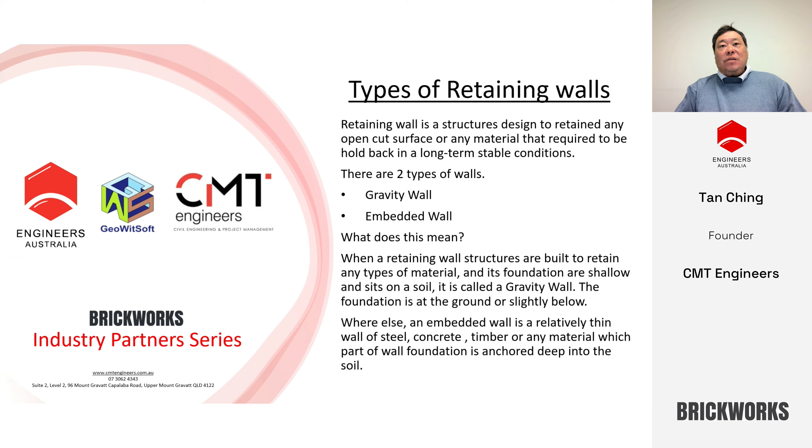Whereas in embedded wall, it is a relatively thin wall, thin steel structures, timber, and any material which forms part of the foundation. And the foundation is anchored deep into the soil. So that's the difference between the two of them. One, the foundation is shallow. The other is deep into the soil.

Now, that's a couple of pictures here showing types of gravity walls that's been widely used in the industry. I've shown 5 types of gravity wall. One is called a masonry wall. It is actually a block wall, which is hollow. And when it is built, you actually fill it with concrete and steel reinforcement. The next one is called a reinforced wall.

It is commonly used in bridge abutment. And the disadvantage of this wall is that it's got geogrid and tie-back reinforcement right behind the precast concrete panel of that reinforced wall that relies on the backfill material for friction to hold the wall. The next picture is a stone wall. It can actually be a sandstone block cut in size, or it can be cobblestone or large boulders built up as a mass gravity wall.

The other one is normally called a crib wall. It actually consists of precast units, which are stacked up and assembled into a height to retain the soil, and is infilled with road-base material, which forms part of a mass gravity wall. The last of it is the concrete reinforced wall, which conventionally is a designed wall, a custom designed wall, where you design based on the height, the soil foundation, and is a concrete reinforced wall which has steel reinforcement and concrete forming part of the wall.

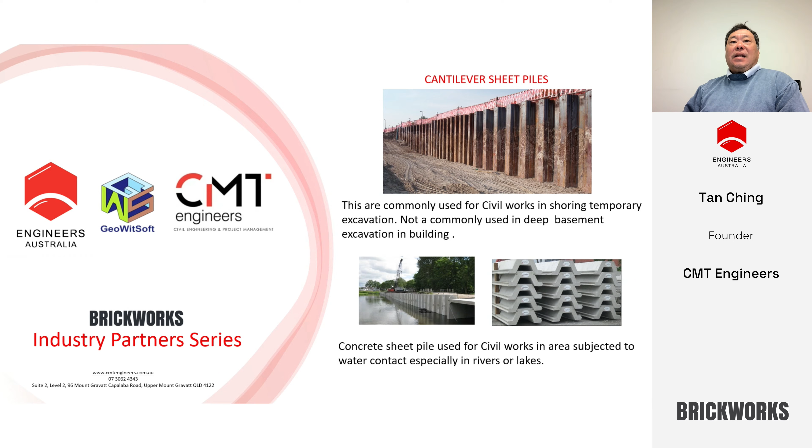These are all basically cantilever design embedded walls. Another type of embedded wall is contiguous bore piles, piles constructed by drilling rigs, where they are drilled below the ground next to each other, and then excavated to expose their surface. It's basically a cantilever embedded wall design, widely used in the construction of basements of buildings.

The next picture is a picture of contiguous bore piles being used to hold a road embankment, where road works are being done below the toe of the piles.

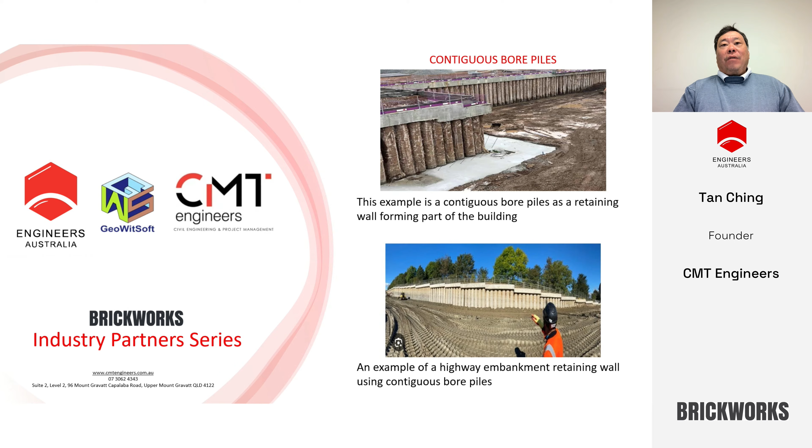Another type of embedded wall, I wouldn't call them piles, is secant piles. You can see from the schematic diagram that it's actually piles intersecting each other, very widely used in deep excavation, where you want to prevent water from coming into the basement. They are used in buildings, especially deep buildings. If I'm not mistaken, I think the Queen's Wharf project in Brisbane was using secant pile or diaphragm wall.

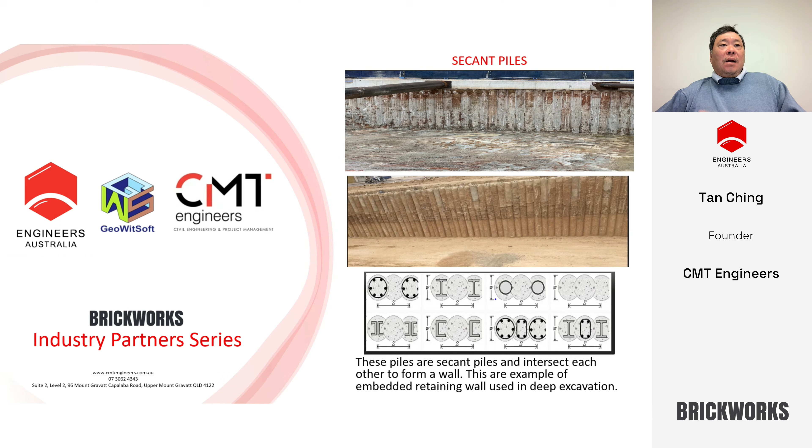Okay, let's see what the current AS4678 2002 says anyway.

In the current code of AS4678, there is no section or any design on embedded wall. Please take note, because there is a lot of king post wall, especially for brownfield and infill jobs, projects, where designers are designing embedded wall and they are not using the right formula.

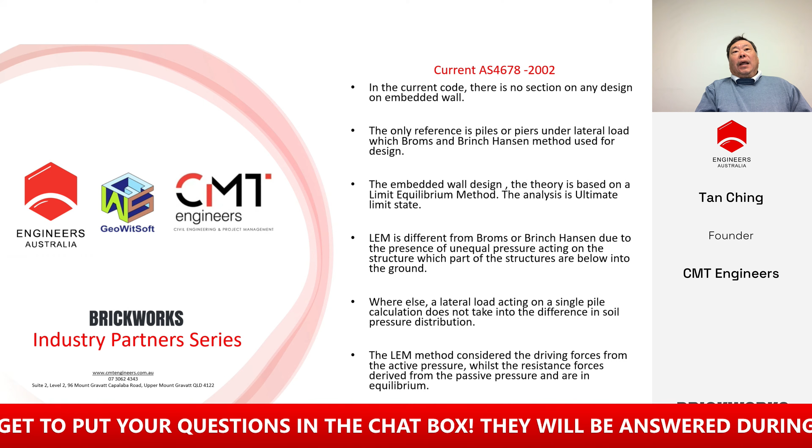The only reference that's in AS4678 on piles or posts under lateral load is the Brinch-Hansen and the Brom's method used in the design, and that is in accordance to the piling code. The design of an embedded wall uses a theory called limit equilibrium method, and this analysis is ultimate limit state.

This formula has been around for the last 24 years, and is widely used for all embedded wall design in large projects. However, AS4678 has no reference to that LEM method.

The difference between the LEM method and Brom's and Brinch-Hansen is due to the presence of unequal pressure acting on the structure, which form part of structures below into the ground. So it's a totally different set of calculation and methodology, where Brom's-Brinch-Hansen is just a lateral load, not due to pressure, but a lateral load acting on the pile, whereas the LEM is actually a set of calculation which is due to the difference of soil pressure that causes a loading onto the structures.

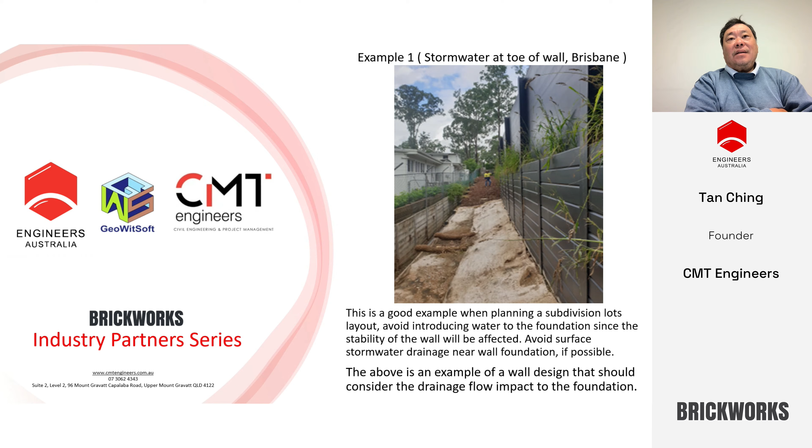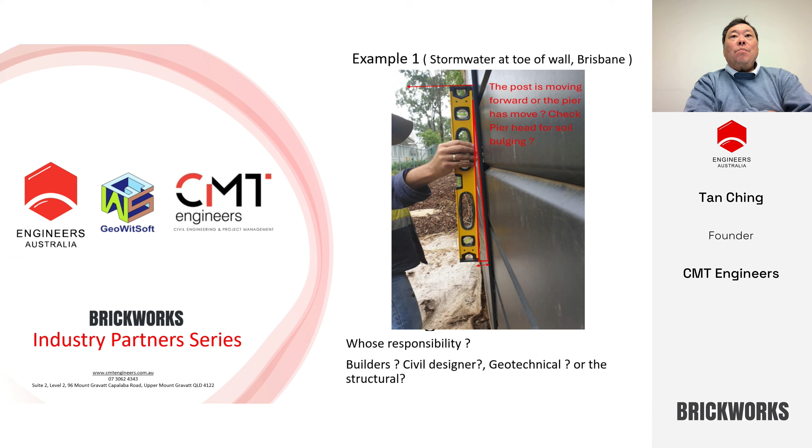A typical example, I will show you what goes wrong. A real life project down in Brisbane, a stormwater at the toe of the wall. Did the civil engineer think about the wall? Did the wall designer think about the stormwater? Guess what happened? The wall moved. That's a real life project. The wall actually moved. Now, whose responsibility is that?

Overland flow path - see the upstream, behind the wall? It's a big patch of open space, and water was just sheeting, flowing down, and it wasn't taken into account in the design. It's a very good example when you design a wall: think about sheet flow, and involve the structural and geotechnical engineers. You've got to highlight to the civil engineer that water is always the culprit of wall failure, and ask whether the water sheeting from behind is being captured and diverted. These are all risks that can be mitigated as a designer.

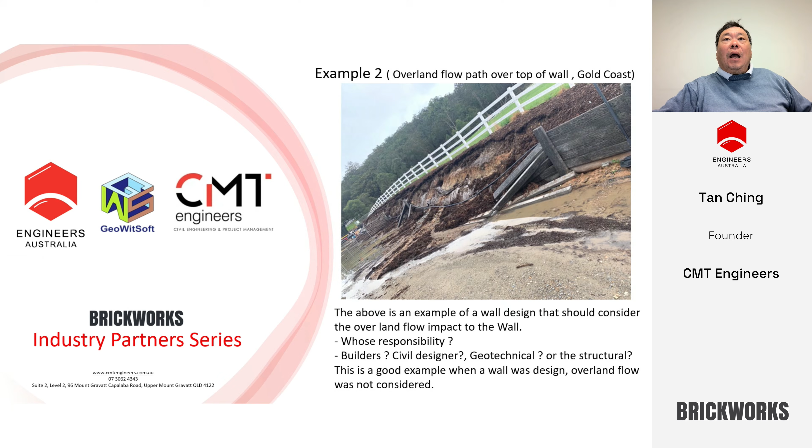In a normal LEM method calculation, you have to do two parts. One is the LEM method, where you find the embedment depth. The next part is to find the serviceability, where you normally use a soil structure interaction to find out the deflection on the piers and the posts.

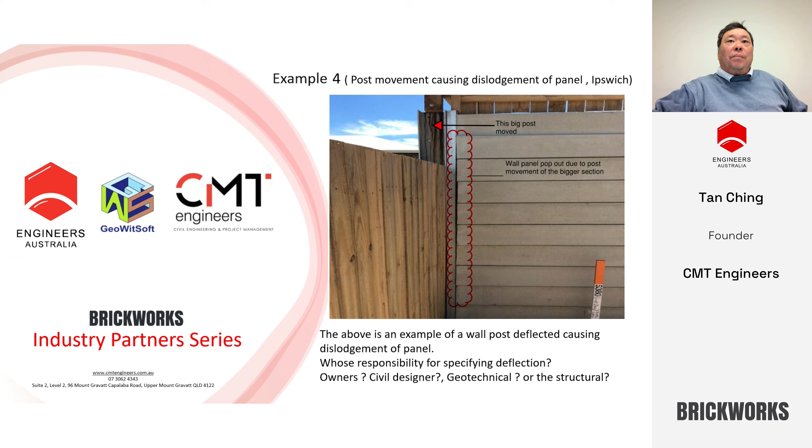A typical good example for civil engineers: when you do site stormwater drainage next to a wall, please consider diverting and capturing your water away from the wall, or design for the surface water.

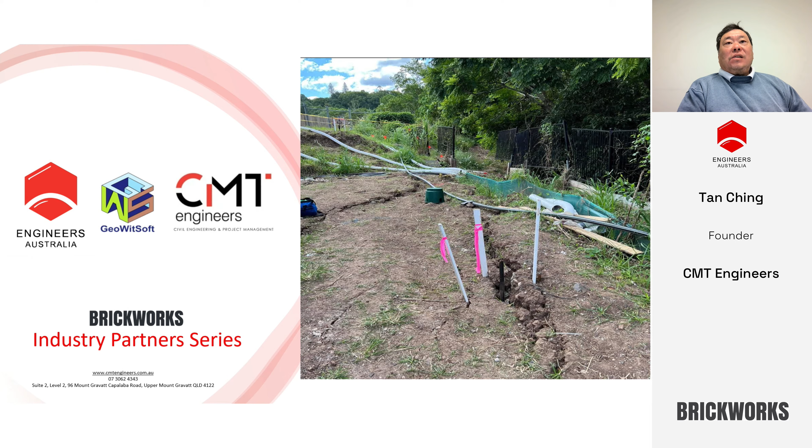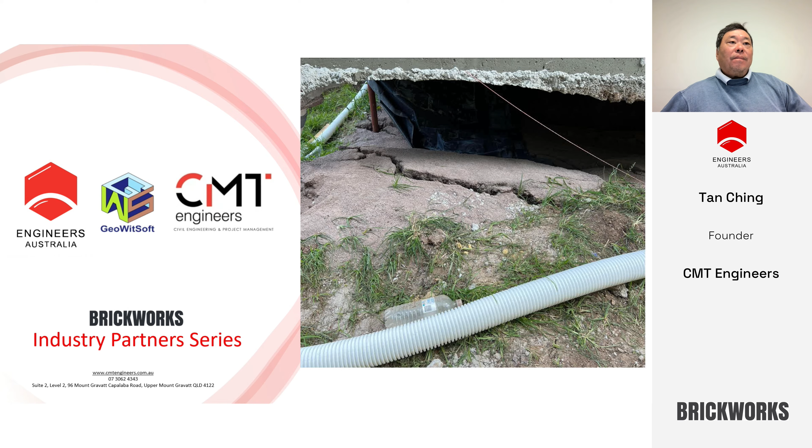Next to the wall was a house on screw piers, and the whole land had subsided and separated out from the house foundation. There you are, you can see the house sitting in the original position, and the land has subsided.

When you design an embedded wall, always be cautious that if a wall is built on a slope area and is holding a fill, or is holding a fill sitting on a slope, just be cautious that a slope stability analysis needs to be undertaken. It's not just about designing the wall itself to stand.

My next point on mitigation of design risk is from the point of view of a builder. As a builder, when you build, just make sure that your material compliance is met, especially for steel posts. Check the steel mill certificate, whether they are as per ACRS or not, because steel sections coming from overseas are different from steel sections manufactured in Australia. Just be cautious about it.

Even if you might have a mill certificate produced from overseas, it is not exactly the same as what is required in Australia. Take note of this, because their grading is totally different anyway.

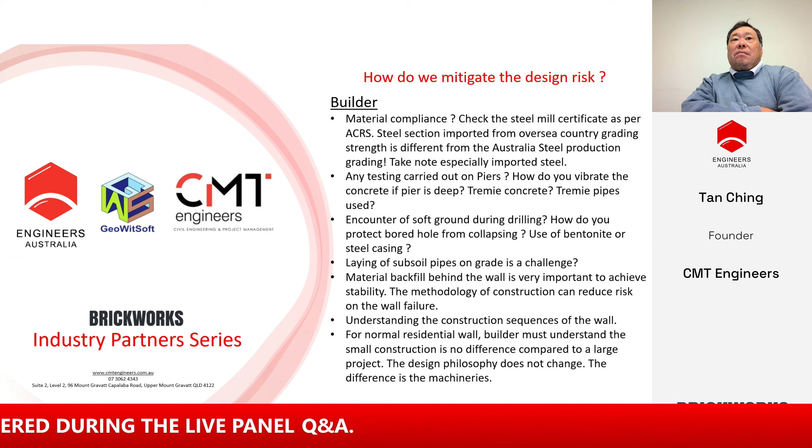Next, make sure you test or carry out checks on the piers. How do you vibrate the concrete if it's too deep? What sort of concrete are you using? Are you using tremie concrete? Are tremie pipes being used? I know tremie pipes and tremie concrete are used for large scale projects which have deep holes, but bear in mind these are good practices, because you want to ensure the concrete is fully compacted and not segregated.

The next point is how a builder can assist a designer to mitigate risk. If you drill a normal ground and encounter soft ground which is different from other holes you've drilled upstream or downstream, think carefully whether the hole is going to collapse, or how are you going to prevent the collapse. These are all things that can help a designer mitigate risk.

It is actually a construction methodology. For small infill jobs, one meter up to two meters, I know a lot of people don't use casing. They normally use forms, buying a circular form to try to hold back the holes from collapsing. But bearing in mind, at the end of the day it's the quality of the piers that is very important and will help mitigate the design risk.

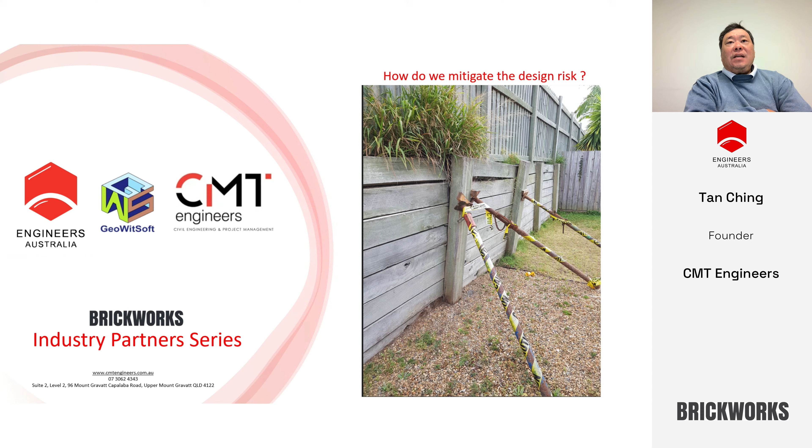A two-tier wall failure, right here in Brisbane. There's an acoustic fence on top of the upper wall, and the separation between the upper wall and lower wall is minimal. Panels dropping off tell you that the post has failed, meaning the embedded piles or piers below the ground have all moved, causing dislodgement of the panels.

A typical design in a clouded area showing some design work, then some construction work, and patch-up work for a wall in a large subdivision. That's the blow-up of the area, showing how the whole panel and post are being held up by just a piece of reinforcement rod.

That's real life. That's happening out there, really happening out there. And engineers who inspected the wall sign it off, and it's shocking.

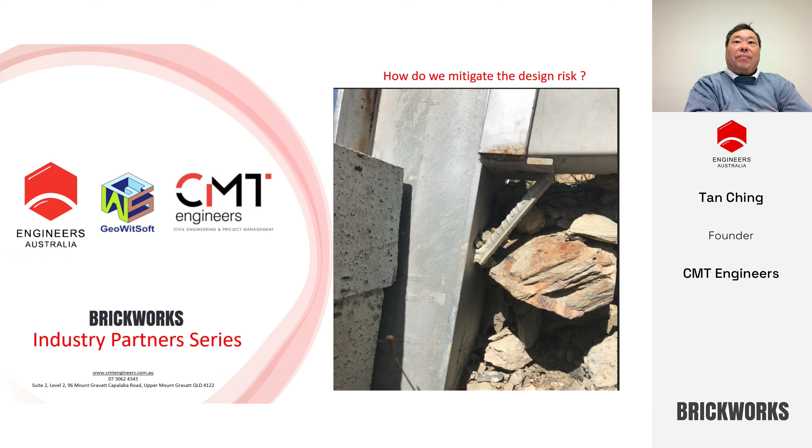All right, next, sheet pile movement. Yep, that was down in Brisbane. Whole entire sheet pile move. Sewage pipe right behind that building there was all dislocated. It was a basement excavation using sheet pile. That's 100% failure due to movement and toe embedment, not enough, insufficient.

An overland flow path. Imagine how strong the impact of water energy causing a dislodgement of a concrete slipper wall. It's not the geotechnical or the structural engineer's fault, but I'll put it onto the civil engineer for not being able to see the impact of surface water.

In the AS 4678 next amendment, there will be some sort of cutoff drain in one of the chapters that the civil engineer will have to design to capture the overland flow path if there is, or any on-site stormwater. So take note.

Slipper wall or embedded wall, any gravity wall, the design is not just solely on a geotechnical or structural engineer's responsibility. It is also a civil engineer's responsibility. It is a complete system consisting of 3 disciplines.

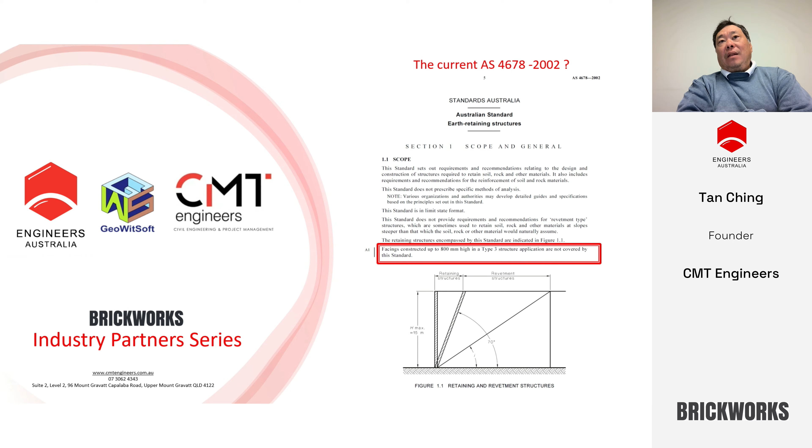And I'll give you a little bit of history about AS 4678-2002. When AS 4678-2002 was published 25 years ago, with only one amendment in year 2003, the building code, or the national code as it's now known, has never had any compliance reference on designing retaining walls, which is classified as 10B. This means a retaining wall, engineered, has no performance standard to gauge with. It was only in 2019 that NCC decided to publish a section on retaining wall design and make reference to AS 4678-2002. So that's an extract from the NCC code.

So what does it tell us? So this is what it means. It says that prior to AS 4678-2002, any design of a retaining wall, be it a large project or a small project, there was no code for the design of any retaining wall at all. The engineer was responsible for his own design and using his own design criteria set in the design.

When AS 4678-2002 was published, all walls from then onwards had to be designed as per the code. And that is the reference for wall design that every engineer uses now. But as I said before, until 2019, there was no reference in the building code at all. In 2019, NCC decided to put in a code to say that, hey, it's a 10B classification, it now needs a performance standard. So the AS 4678 is the measuring tool to measure the performance of the wall.

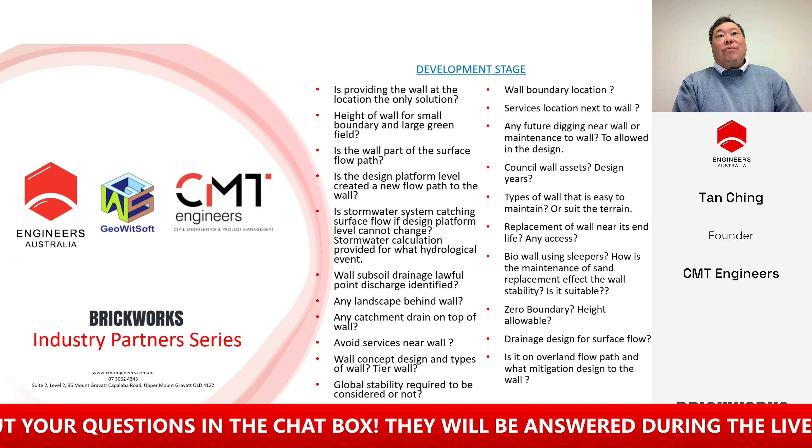In a development stage where you get a big project and you assess the layout and the engineering concept, these are a couple of questions you always have to ask while vetting the drawings. Is the wall building on that location the only solution?

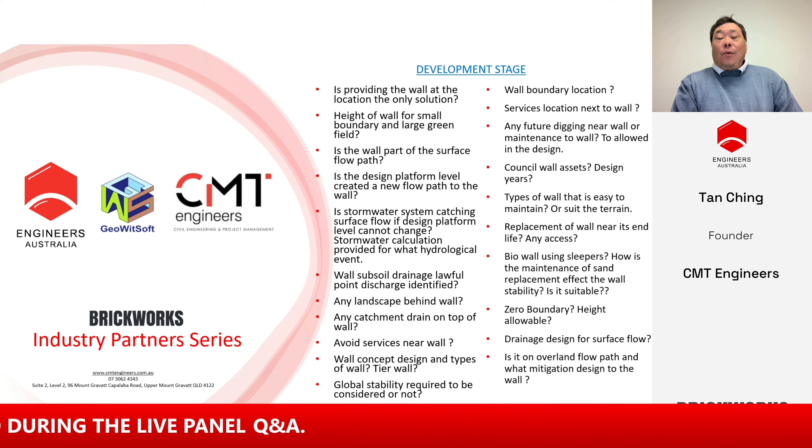Do you need to fill that high, or is there any other way? Are the height and the boundary location of the small wall right? Are they bound at the boundary, or in the upper wall or the lower wall?

Is there any flow path coming down behind the wall? Is the design platform created to allow a new flow path into the wall? This is an example where you build a wall on a natural surface water flow path - you don't want to do that.

That's creating risk. If there is an upstream catchment coming down and you can't avoid it, well, have you thought about the drainage? Has the drainage been calculated? Has the drainage been designed right behind the wall to capture that? And what's the stormwater event that is needed to calculate?

Is subsoil pipe drainage laid to a lawful point of discharge, and has it been identified? Is there any landscape behind the wall? These are all things that will influence the performance of the wall. Any catchment drain on top of the wall?

Is there any services there? Can it be avoided? What type of wall is it - a tier wall? Is it a concrete sleeper wall? Is it a block wall?

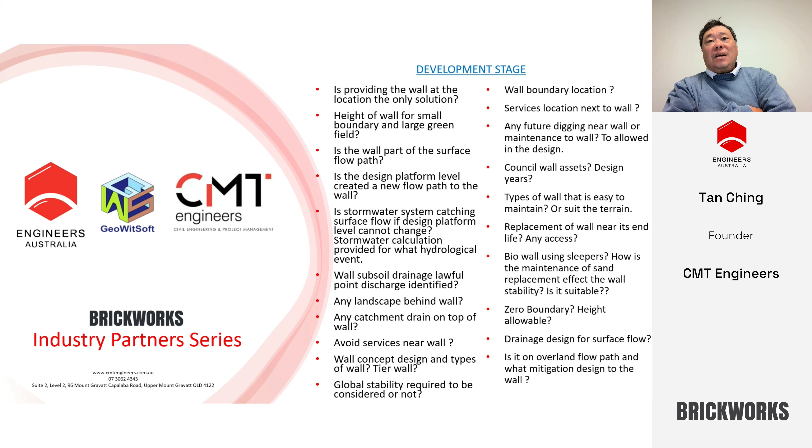Drainage design for surface flow and overland flow path, how you mitigate it. So when it comes to operational work, that's where you do your detailed checking - make sure that soil investigation reports are given and what types of testing, not just site classification.

That's not right anyway. Was there any global stability undertaken? Next question - did the structural and geotechnical drawings form part of the project consultant, not piecemeal?

You've got to make sure the design of the wall by the geotechnical and the structural engineers is incorporated into the civil set so that you get a complete set. You have track records and records on the documents.

The wall products - if we are using a wall product to form a wall system, is it approved? Is it approved by the building code? In the building code, does it meet the fire rating?

And the next thing is check the Form 15, make sure there's no exclusion - very common. The structural engineer will say that he's designed the wall, but exclude geotechnical. The civil guy will not even do any Form 15 for the retaining wall because he says he's not involved in drainage. So who is involved in drainage?

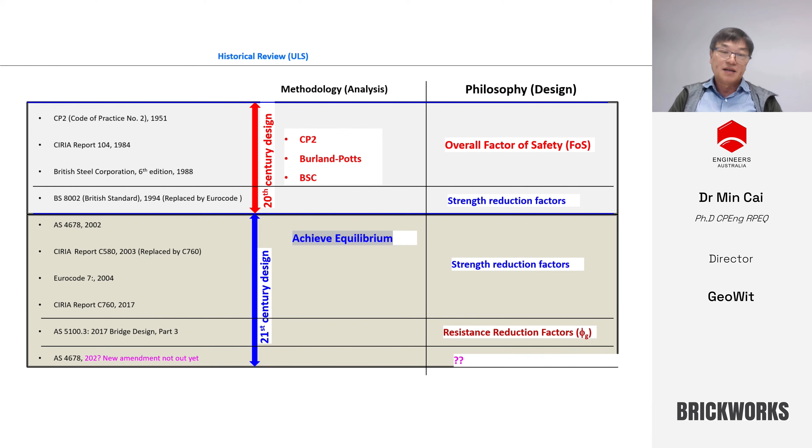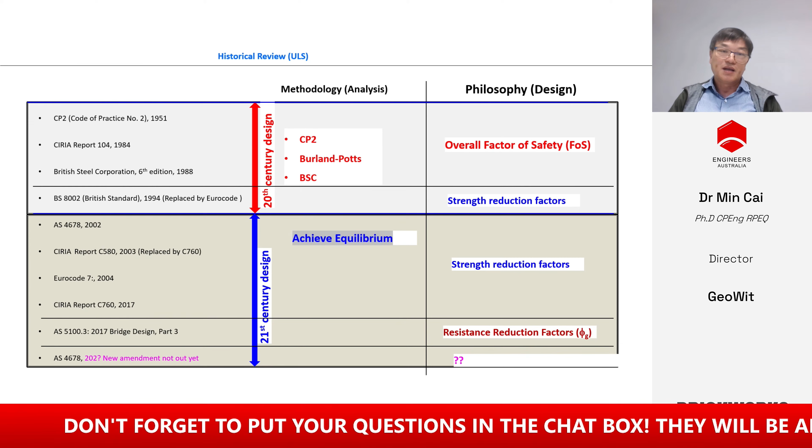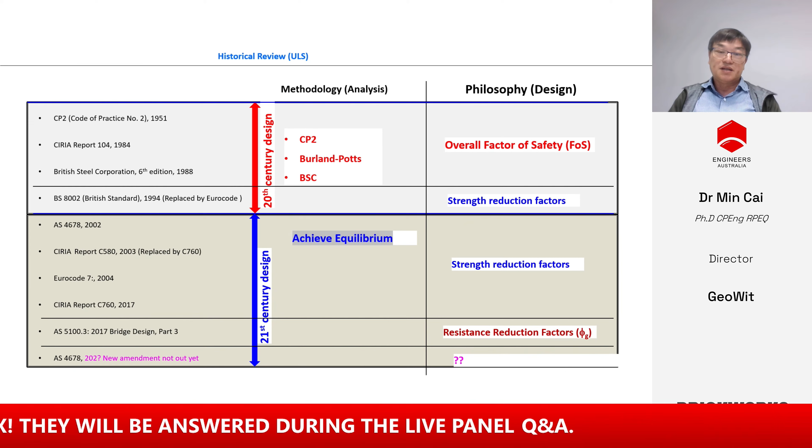I'll come to the methodology of analysis first. Any geotech engineer with experience designing embedded retaining walls must be familiar with terminology like CP2, Burland-Potts method, BSC method. But it's very interesting to note that when it comes to recent design codes, reports, and documents, all these conventional methods have disappeared. The key word has become something like 'achieve equilibrium.' So from a design philosophy point of view, it has gradually evolved from the traditional overall factor of safety method to the strength reduction factor method, or resistance reduction factor method.

I'll dig a little bit deeper into the methodology of analysis, taking the cantilever wall as one example. The cantilever basically relies 100% on the depth of embedment to achieve equilibrium and stability. So the failure mode is against a point close to the pile toe, generally referred to as the pivot point. Below and above that point, the earth pressure changes direction. This is the theoretically correct approach.

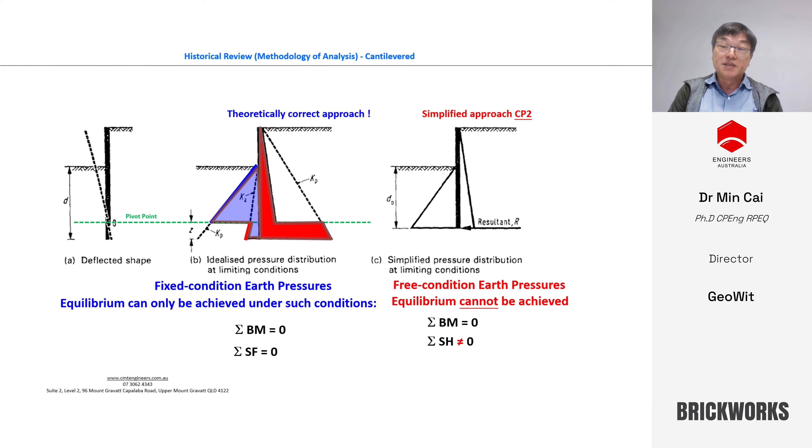We've got two equations, and from these we can determine where the pivot point is and where the toe level is. But unfortunately this analysis itself is quite complex, which has left room for a simplified approach like CP2. The CP2 method was first proposed in CIRIA report 104. It is not a complete equilibrium solution, as I'll show in the next slides. The bending moment is at equilibrium, but the shear force is not.

CIRIA report 760 has a bit more detail about this methodology, but basically the principles are exactly the same: two equations, two unknowns. The unknowns for the cantilever are basically the pivot point and the toe level. I won't go into the details of that, but anyone interested can have a look at the CIRIA report.

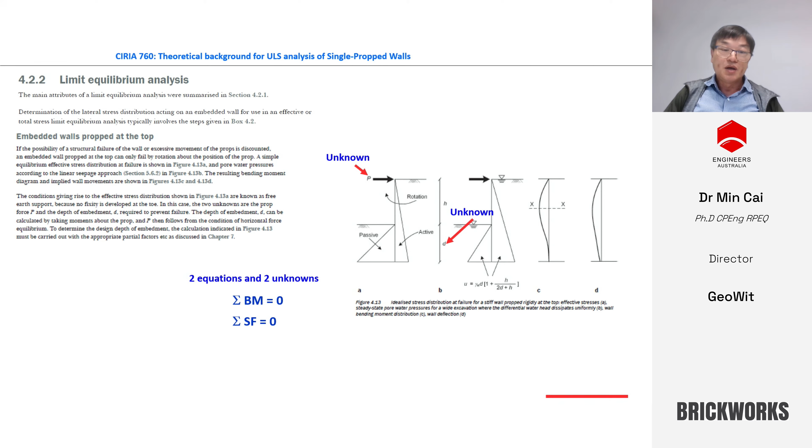The CIRIA report also has a section for single propped walls. The principle and approach are exactly the same: two equations and two unknowns, but this time the unknowns become the prop force and the embedment. This makes the calculation much simpler, because if you take the bending moment against the physical support point, you only have one unknown left. I just want to show something visually with some charts.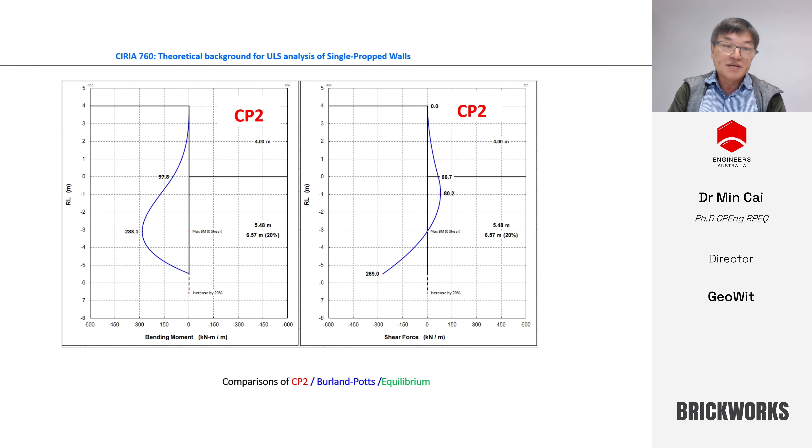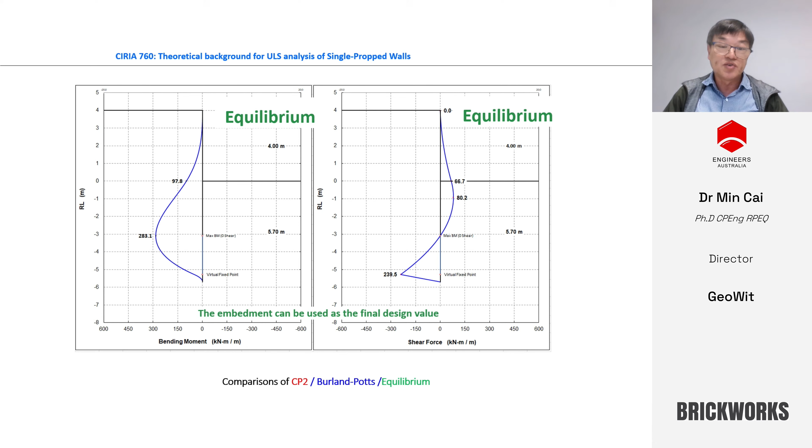Hopefully that makes it easier for everyone to appreciate. I've come up with a worked example using the CP2 method that clearly shows the bending moment is not in equilibrium for shear force. As illustrated in CIRIA report 104, to cater for this incompleteness, a 20% increase of the calculated embedment should be applied. I've also done a full equilibrium method, and you can see that both the bending moment and shear force are at equilibrium, so the calculated embedment can be used as the final design value.

I'd like to wrap up the methodology by comparing the results from different methods. The red dotted line is the toe level from CP2, blue is from Burland-Potts, and green is from the equilibrium method. I think this also partially explains why conventional methods like CP2, Burland-Potts, and BSC were never mentioned in recent design codes, because in my opinion the equilibrium method is a better option: it's theoretically sound, mathematically complete, and in line with all recent international standards and Australian standards. On top of that, it can give us a more economical design.

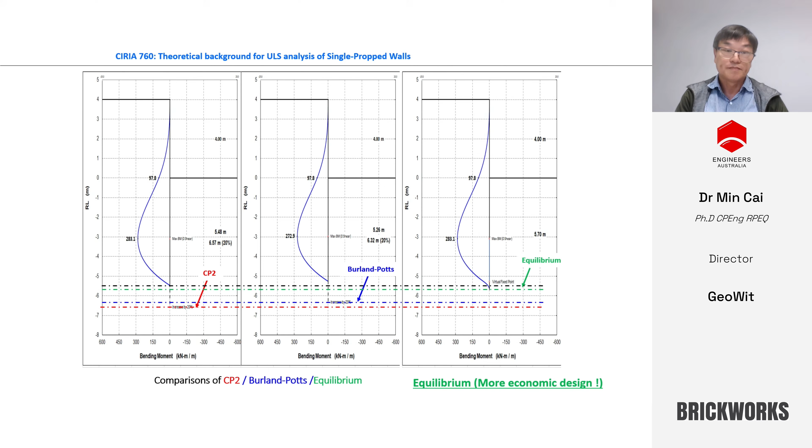Another important ULS failure mode is the piping resulting from seepage. I've shown some theoretical background - if you have any water height difference in soil, you will generate seepage. This seepage force is in proportion to the hydraulic gradient. Another important factor is how much hydraulic gradient can be taken by soil. Looking at this equation called ICR, it's interesting to note this ICR is similar to the submerged density. So the factor of safety is defined by the ratio of the I critical to the I exit.

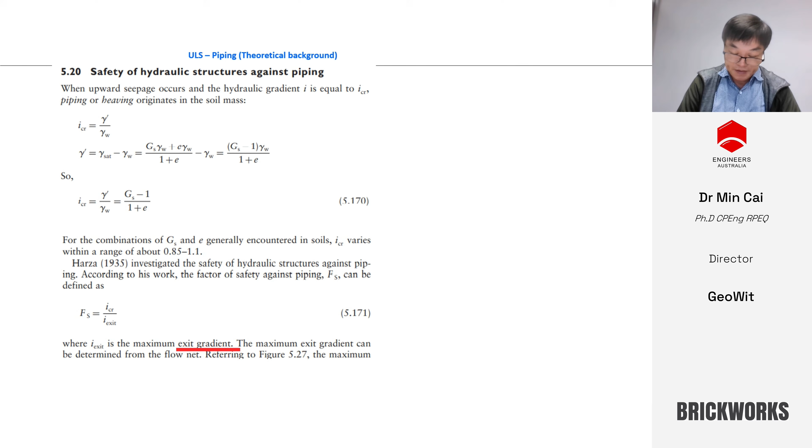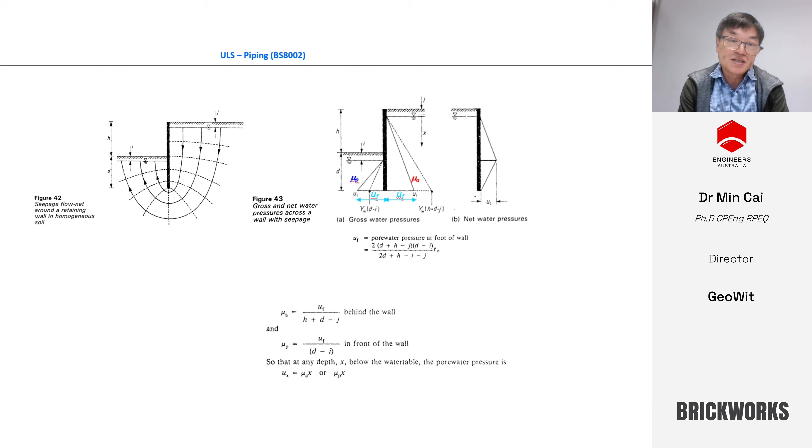This is what I've extracted from BS8002. It shows how to calculate the water pressures, including seepage. This is the design requirement as illustrated in Eurocode. It's interesting to note that the equations shown in Eurocode are the same as the theory, because the ratio of gamma dash by gamma W is actually the ICR, and delta H divided by D is actually the I exit. Eurocode has also given some partial factors for design: 1.35 for unfavorable and 0.9 for favorable. It is equivalent to an overall factor of safety of 1.5.

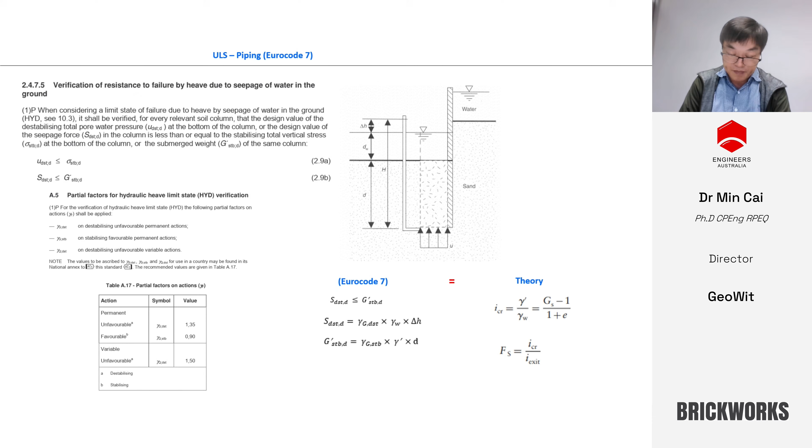So after these two overall requirements, we come to bits and pieces for the calculation itself.

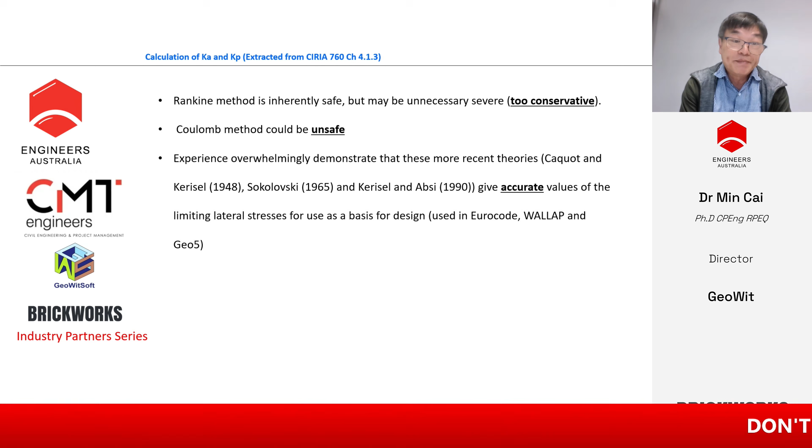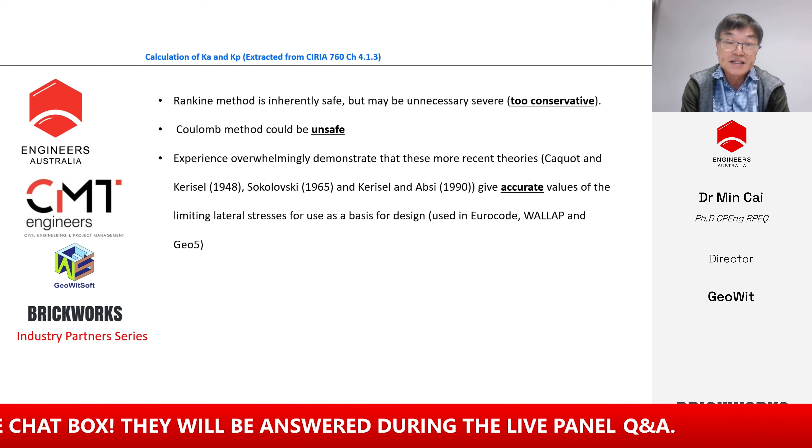I think the first thing we need to calculate normally is the Ka and the Kp. People either use a Rankine method or Coulomb method to do the calculation. I'd like to draw attention to what has been described in CIRIA report 760, chapter 4.1.3. Basically it says the Rankine method could be too conservative, and the Coulomb method could be unsafe. But recent theories, like what I've shown here, give accurate values of the limiting lateral stress for use as a basis for design. This has been used in Eurocode and in some commercial software like WALLAP and Geo5. These are the equations incorporating this recent theory - I won't go into details, but if you're interested you can have a look.

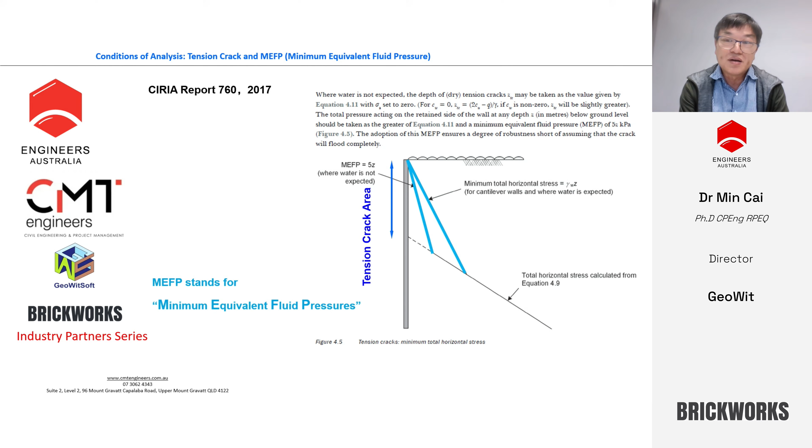Another important design consideration is tension cracks. We all know if we use a high C dash value, the top portion of the retaining wall will be subject to nothing - but the code does not want you to do that. It has introduced a concept called MEFP, minimum equivalent fluid pressure. If water is expected on the site, you have to consider the scenario where the tension crack could be filled by water, so you must use minimum pressure. Your MEFP should be like 10 times Z. Even if water is not expected, you still have to use a minimum MEFP equal to 5Z - that's almost equivalent to a Ka value of 0.25. BS8002 has a slightly different methodology to deal with tension cracks, but whatever it is, you still have to apply MEFP. You still cannot allow a portion of the retaining wall to be subject to nothing.

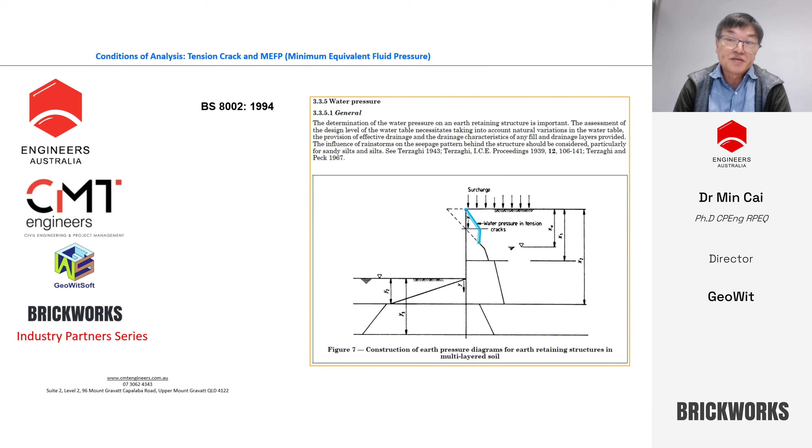Another issue is compaction-induced pressures. We've seen some reports about retaining wall collapse associated with this kind of pressure. So the message is very clear: if you haven't considered compaction-induced pressures, you have to make it clear in your report. Maybe you also need to put some control measures in place on drawings, something like lightweight handheld compactors having to be used with a certain clearance from the wall. Basically, you do what you say and say what you do.

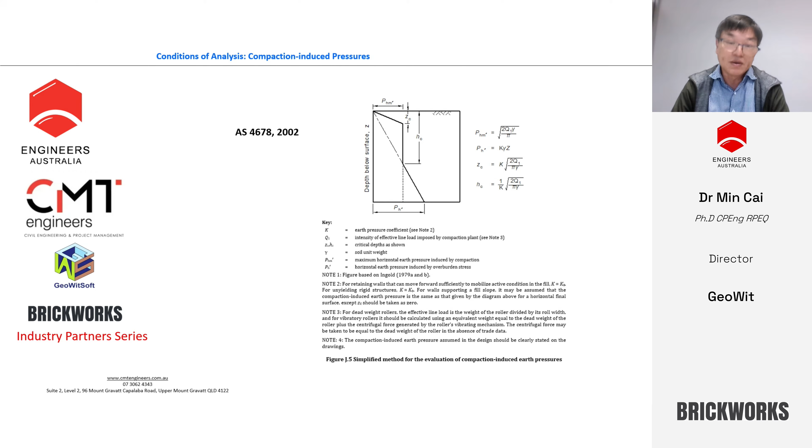After all this review, I'd like to look at what has been included in the current Australian standard regarding embedded retaining walls. It's interesting - there's only one place in the current Australian standard, in Appendix E. It says where retaining walls using embedded parts are adopted at a site, the design of such structures should be carried out as suggested in AS 2159 for laterally loaded piles. You know, AS 2159 is a pile design code.

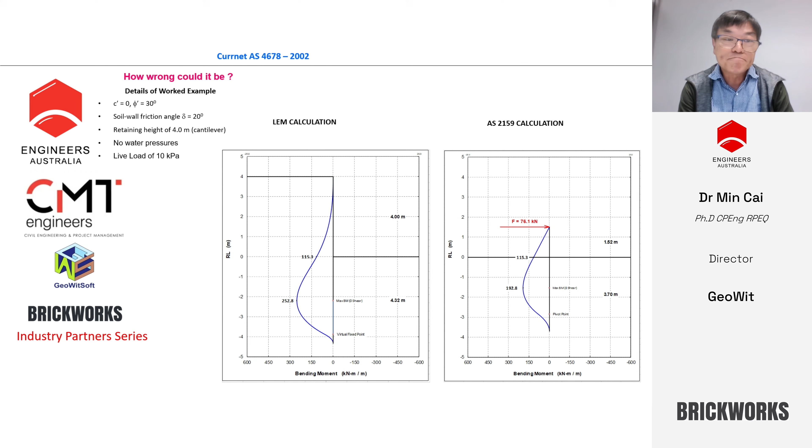So these are the typical cross sections in those two areas. Basically that is a very deep excavation, more than 32 meters, with two diaphragm walls propped by 9 layers of struts, with two JGP slabs. The top JGP is called the sacrificial JGP slab because it will be demolished and removed when the excavation progresses.

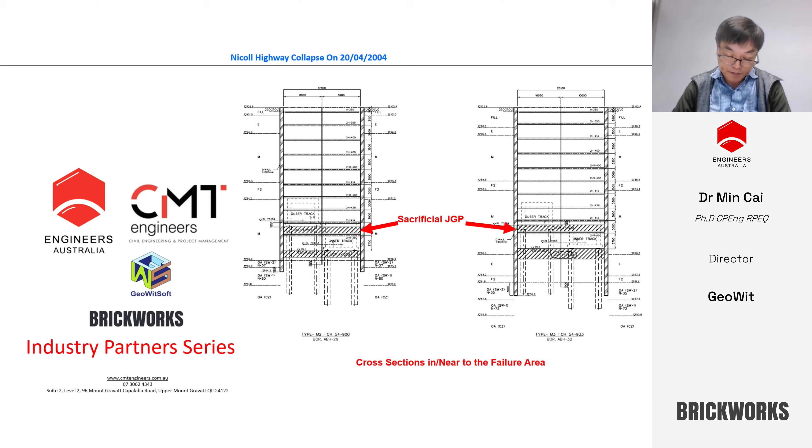A comprehensive monitoring system was in place before the failure. It helped us to see the behavior of the retaining wall system. So these are the two readings from two inclinometer readings.

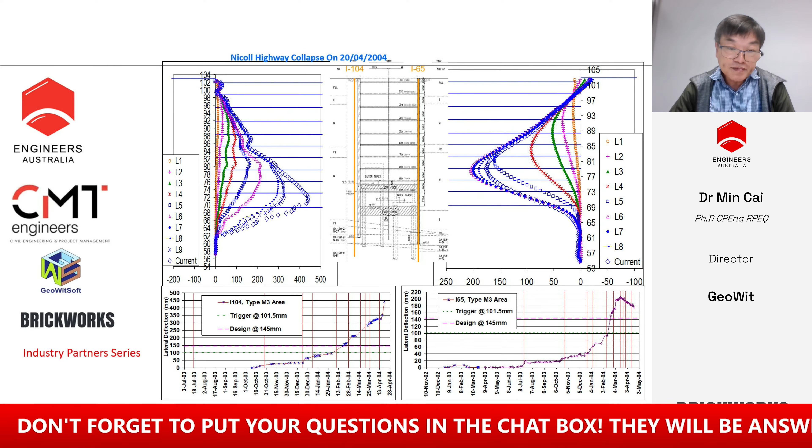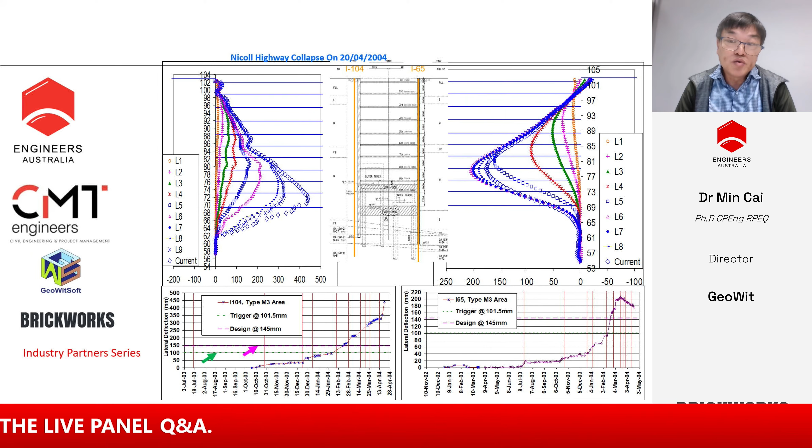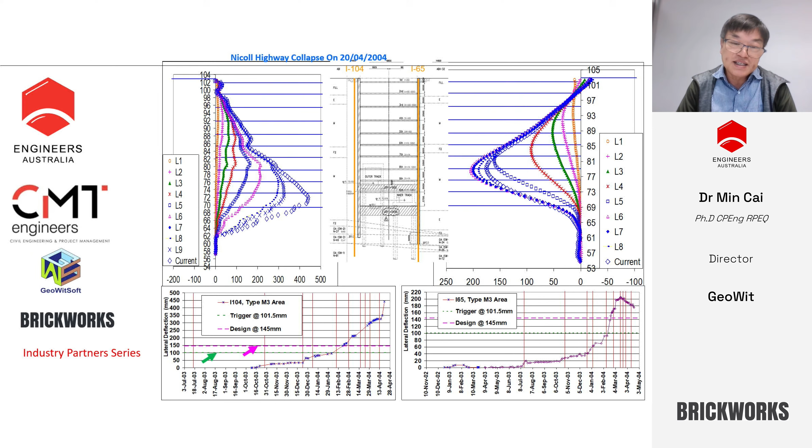So this green dotted line is the trigger level, and the purple line is the design level. As you can see, these two levels have been far exceeded two months before the collapse. Also, within that one week leading to the collapse, we see a sudden increase of wall deflection.

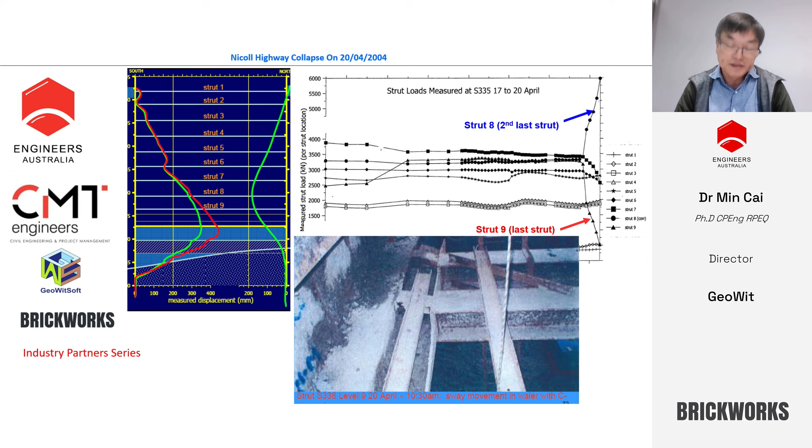After the collapse, I think everybody wanted to know what the real causes were. So LTA has set up a recovery team, and I got heavily involved with that type of work.

So after rounds of discussion with the contractor's consultant, we decided to do our embedment checking independently. About one week later, we came to the same conclusion: the embedment is not adequate.

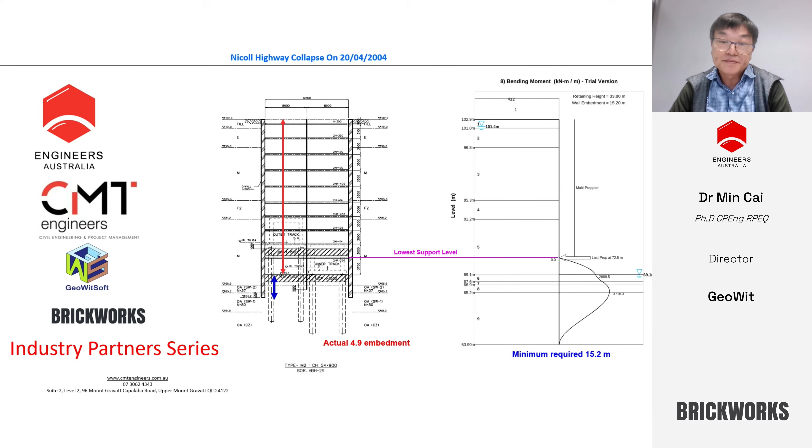To make things worse, even with that 15.2 meter embedment, we have another checking for the piping. We found that the factor of safety is 1.03, far below the required factor of safety of 1.5. So you can see that the embedment is just too little.

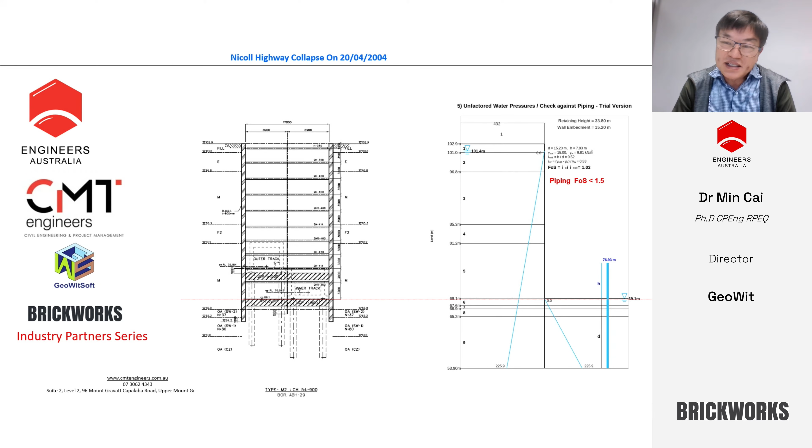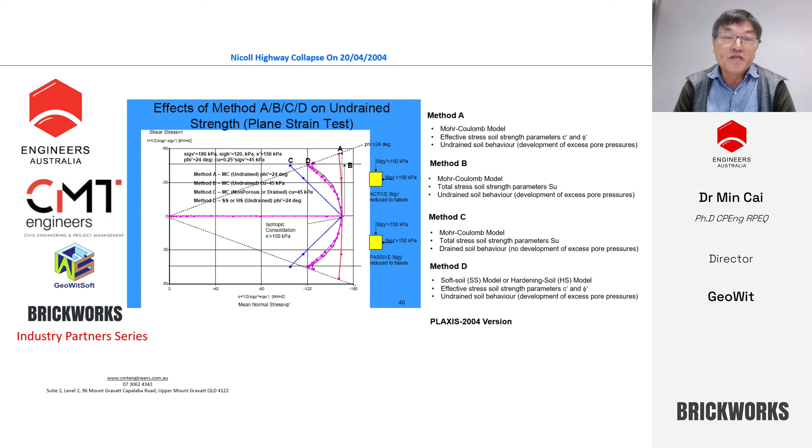So all the experts have done extensive forensic analysis. I think all the experts have unanimously agreed that the Method A adopted by the contractor is not good. Basically, it overestimates the soil strength and underestimates the wall bending moment and the wall deflection a lot. It also underestimates the strut forces.

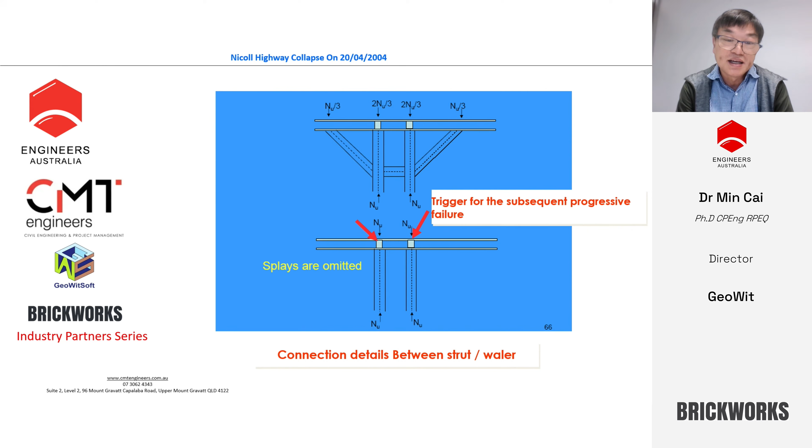Then all the experts also unanimously agreed the trigger starts from the failure of the connection between the last strut and the waler.

The original design looks like this, with a steel plate stiffener. But even with that plate stiffener, some buckling has been observed in some of the areas. I'm not sure whether it's in the collapse area or not, but some buckling has been observed.

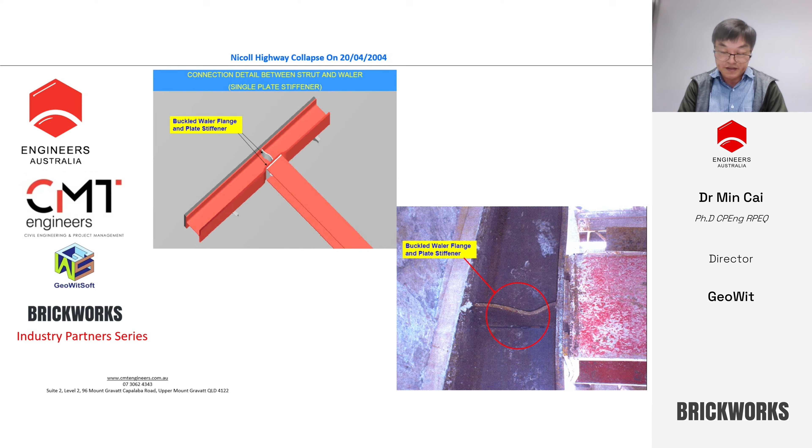But it's very unfortunate when we come to this collapse area. I think several days before the collapse, the contractor realized they had used up all of the steel plates, but they had some C-channel in place. So they then proposed to use the C-channel to replace the steel plate. This is what was actually installed on site. It's really unfortunate.

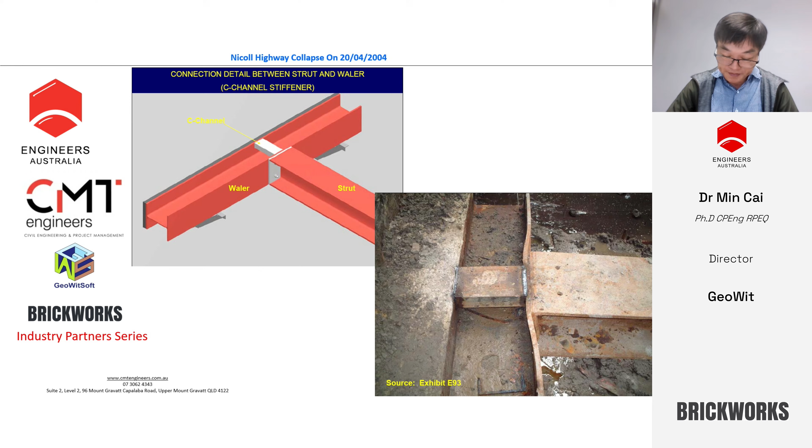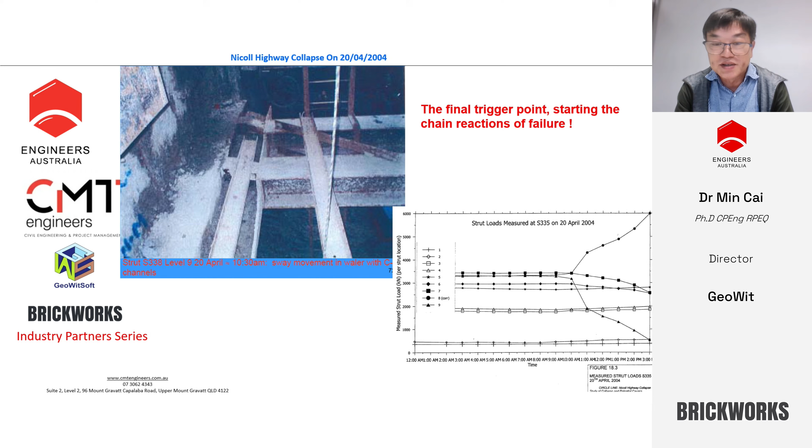So on the day of the collapse, a buckling was observed at the connection between the strut and the waler connection, and a sway movement was observed in the morning of the collapse. This was also well captured in the strut force monitoring.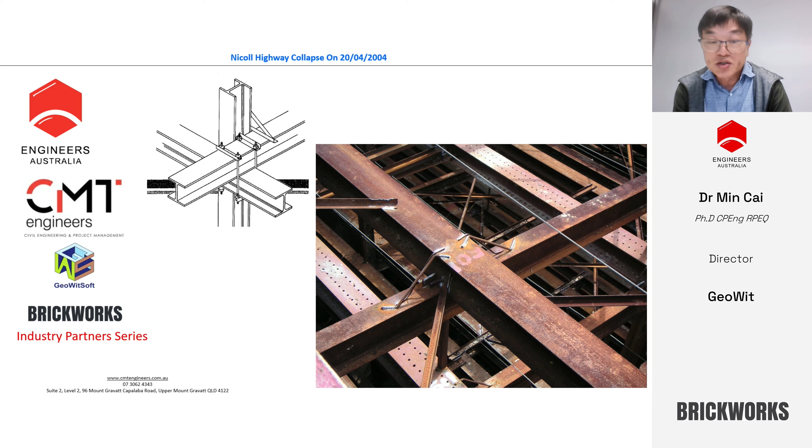Subsequent review by LTA showed some more substantive issues with connections, like the connection between the struts and the king posts. The purpose is to reduce the effective length of the struts to make them work more efficiently. So basically, you look at what has been required and what has been installed on site. Obviously, the connection installed on site is substandard - it could reduce the strut capacity significantly.

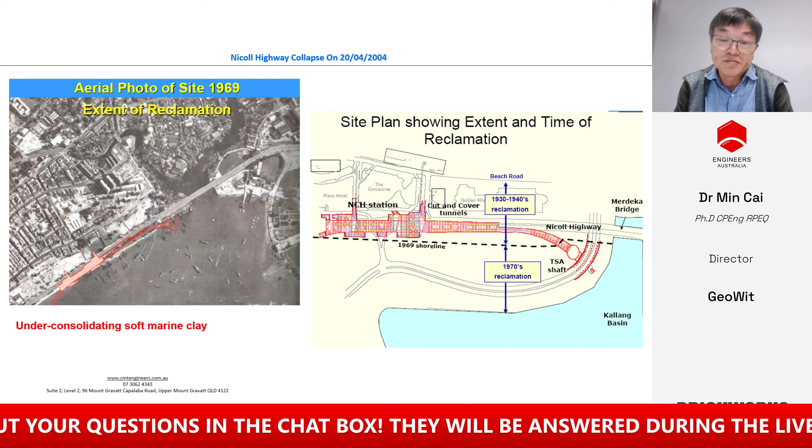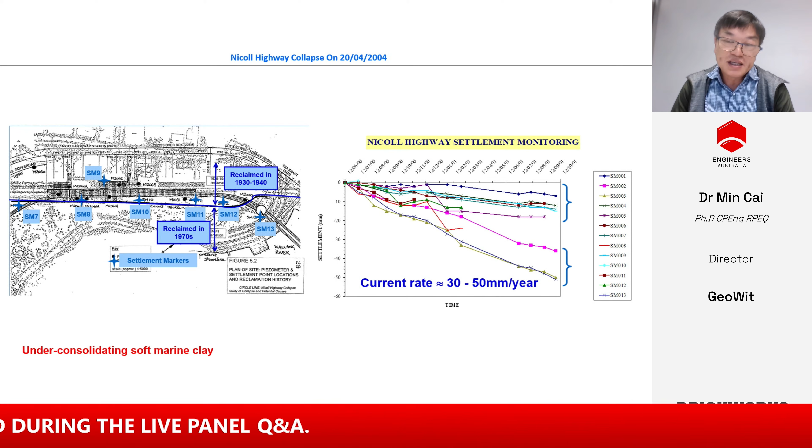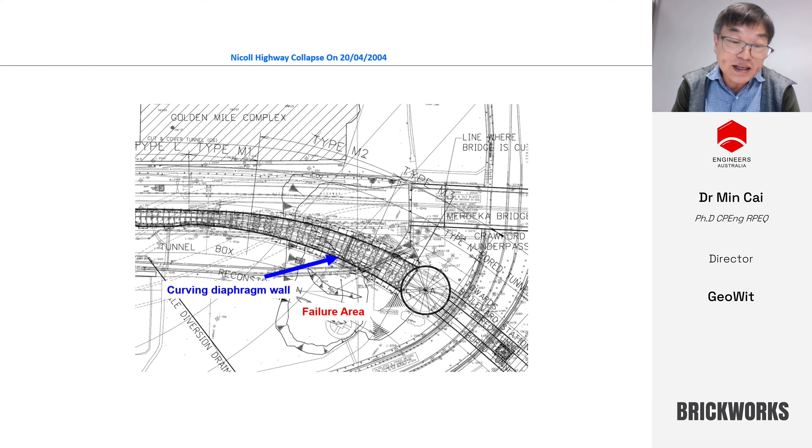Another contributing factor at the site is that the construction site is located on reclaimed land, and the monitoring shows the consolidation was not completed yet at the time of collapse. That could weaken the soft marine clay further. A later three-dimensional analysis shows the curving diaphragm wall in that area could also have played a role in contributing to the collapse.

So after a very lengthy and expensive court case, the case was closed by state prosecution.

So the things we learned from this collapse: ULS analysis, including the piping, must be performed to determine the minimum required embedment. FEM software should never be used like a black box without sound engineering judgment. The over-reliance of design decisions on FEM analysis must be discouraged, and basic engineering mechanics principles must be employed to check or verify FEM results. Steelwork connection details must be done and reviewed by competent persons. Design is not a one-time act, but a continuing process of ensuring that the design assumptions are consistent with reality.

So we come to our Australian standard. We try to reflect that experience and lessons learned as much as possible in our new Australian standard. For example, we have stated very clearly that a set of ULS analysis must be performed.

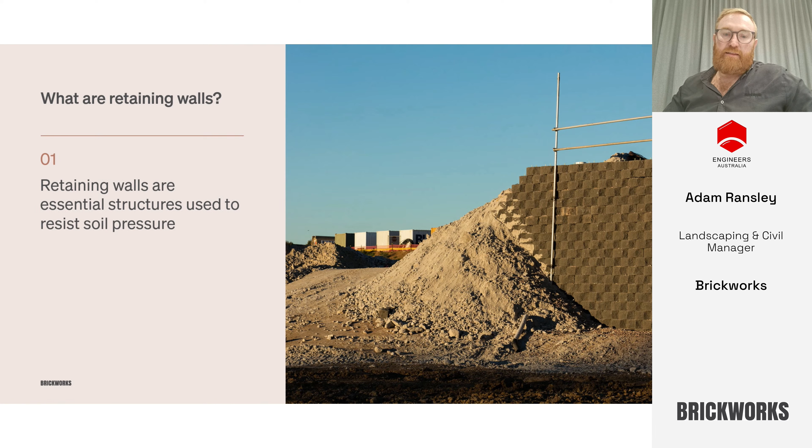Erosion is the natural process of soil, rock, and sediment displacement caused by wind, water, or human activity. In civil projects, uncontrolled erosion can compromise structural integrity and increase maintenance costs. It can lead to slope failure, sediment runoff, and damage to nearby structures or landscapes. Left unmanaged, erosion reshapes landforms over time - unacceptable when building long-life assets like factories or public infrastructure designed to last 60 to 100 years. Retaining walls help control erosion by stabilizing soil, reducing surface runoff, and supporting steep gradients.

Usable land refers to flat, stable ground suitable for construction, access, or landscaping.

Sloped or uneven terrain often limits functionality and development potential. By transforming steep gradients into level surfaces, site usability can be significantly increased. If you look at the image, by building retaining walls, a flat surface is obtained and a space of sediment basin is created in front of the wall. Retaining walls play a key role in the process by creating stable, buildable platforms on challenging terrain.

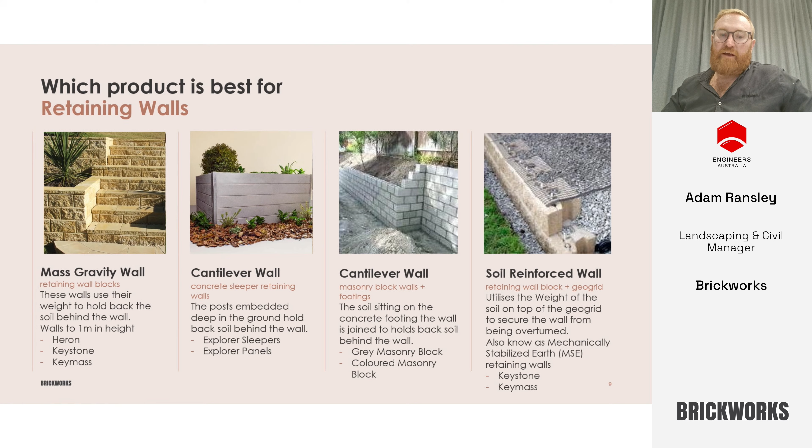A soil reinforced wall strengthens the soil itself using layers of reinforcements such as geogrids, allowing the soil and reinforcement to act together as a stable mass, making it efficient and flexible for taller structures.

So some of the options are masonry grey blocks. A cantilever masonry block retaining wall may appear as a simple landscaping element, but they function as a structural system relying on base footing, stem, and heel stability. These walls must control movement, preventing overturning and sliding, and maintain alignment under varied load conditions.

Cantilever walls rely on a combination of reinforcement and in-situ concrete to achieve structural performance. Reinforcement bars are placed vertically and horizontally with high-strength concrete grouted inside the hollow blocks, forming a complete structure. The blocks act as a permanent formwork, available in different colours and finishes, adding aesthetic value while concealing all structural components.

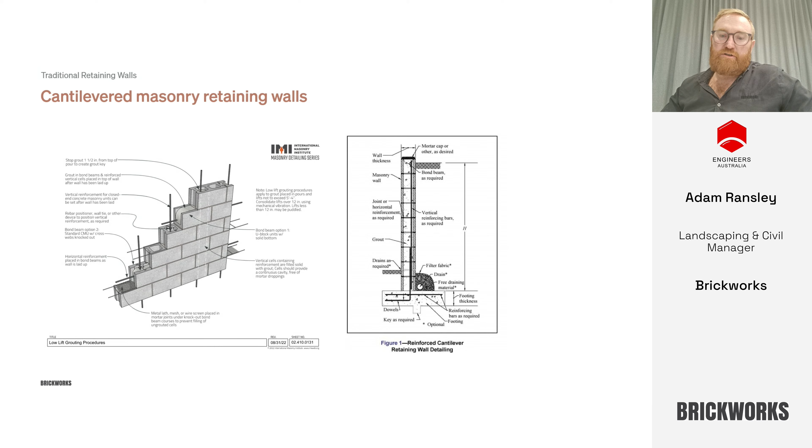Another option is dry stack retaining blocks. Modular blocks are gravity or reinforced walls built using dry stack interlocking concrete blocks. These blocks rely on their mass, interlock, and when required, geogrid reinforcement to resist soil pressures and maintain stability. Heron, Keymass, and Keystone fall into this category. They are widely used in residential, commercial, and infrastructure projects due to their versatility and ease of installation. Modular blocks are available in various sizes, colours, and textures, making them suitable for both structural and aesthetic applications. The system is dry stacked without mortar, allowing minor flexibility and settlement tolerance, especially on expansive soils or curved alignments.

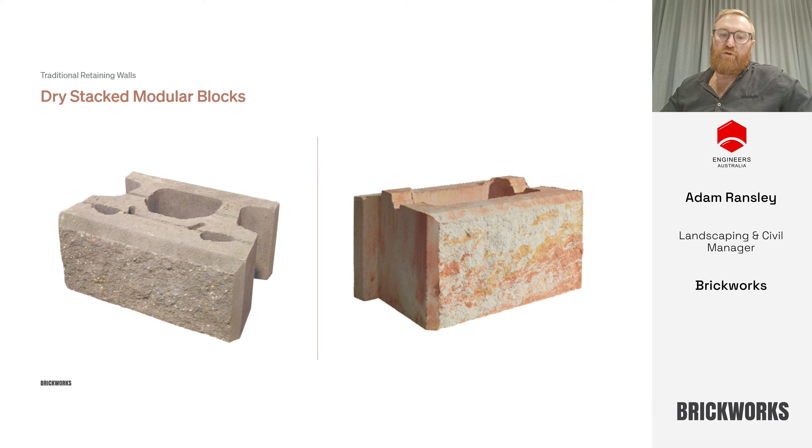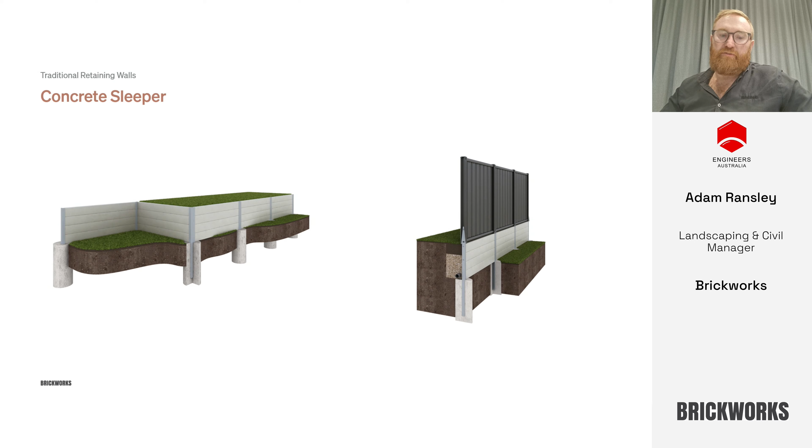Steel H and C section posts are typically hot dip galvanized for corrosion protection and structural performance. Concrete sleepers offer superior longevity, immense structural strength, and high resistance to rot, termites, and other situations such as fire compared to timber. They are low maintenance, preventing warping or splitting, and offer modern aesthetic options. While initial cost and installation can be higher, the durability offers better longer-term value.

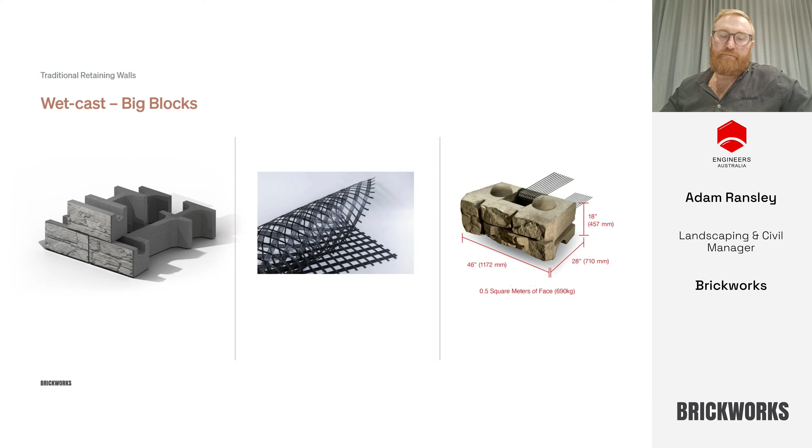Design considerations.

I just want to highlight a case study regarding a concrete sleeper retaining wall. During construction of a retaining wall, an issue arose where the installed posts were found to be inadequate in length for the actual wall height.

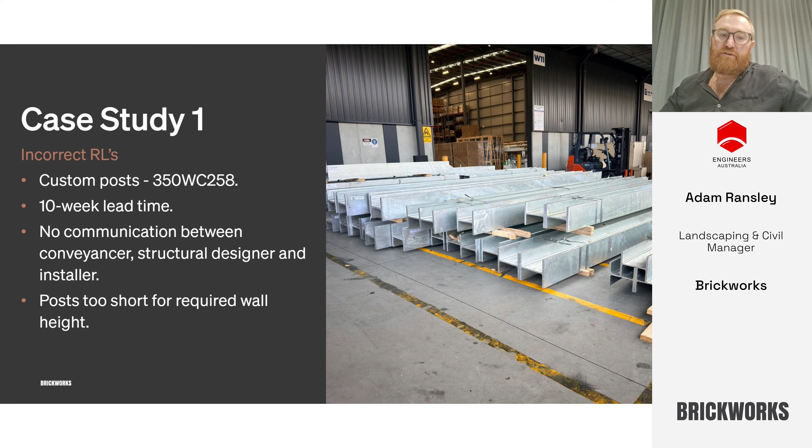The posts had originally been designed and ordered based on the conveyancing provided data, which was later identified as inaccurate once the site conditions were confirmed. As a result, the installed posts did not achieve the required embedment or structural capacity, creating a risk to wall stability and compliance. This presented a significant challenge due to the high cost and long lead time associated with procuring replacement posts. The situation required immediate reassessment of design assumptions, coordination with stakeholders, and exploration of alternative solutions to minimise project delays and cost impacts.

Case study number 2. During construction, an issue arose when service mains were found to be installed in incorrect locations, conflicting with the original retaining wall design. The wall had initially been specified as a concrete sleeper system. However, the rigid design did not allow sufficient flexibility to accommodate the required service connection.

To address the problem, the design was modified to a keystone retaining wall system, which provided greater ability for adjustments around the service mains. The change enabled the integration of the two service connections while maintaining structural integrity through required redesign, coordination, and adjustments to construction sequencing to minimise delays and additional costs.